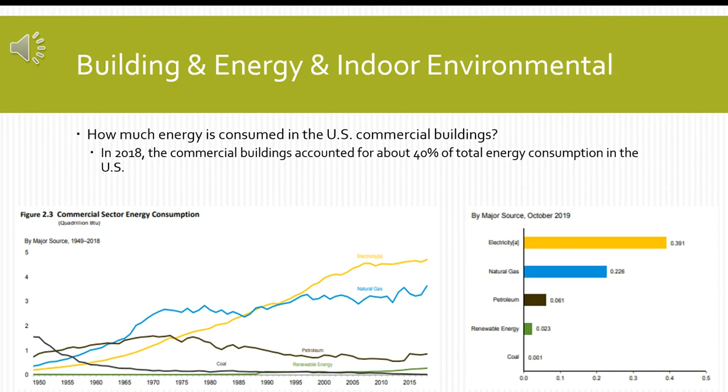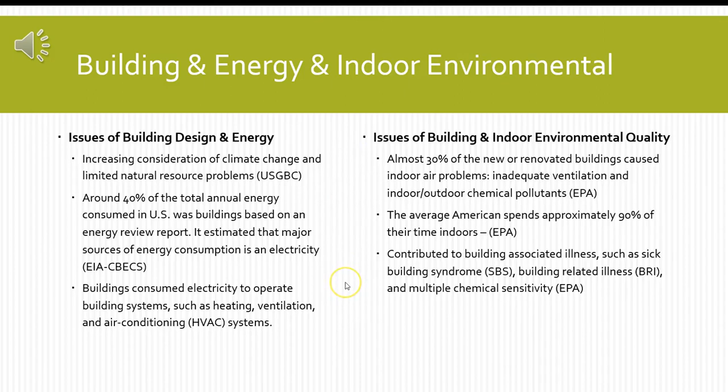Moreover, almost 30% of new or renovated buildings caused indoor air problems because of inadequate ventilation and indoor chemical pollutants. These problems also contributed to building-associated illness. Based on these issues and other research, building design and system were directly related to both indoor air quality and energy efficiency because of buildings' energy performance.

For these reasons, this research identified that sustainable applications to building design and system were critical for improving energy performance of buildings. Sustainable building goals are social equity, environmental justice, community health, and quality of life.

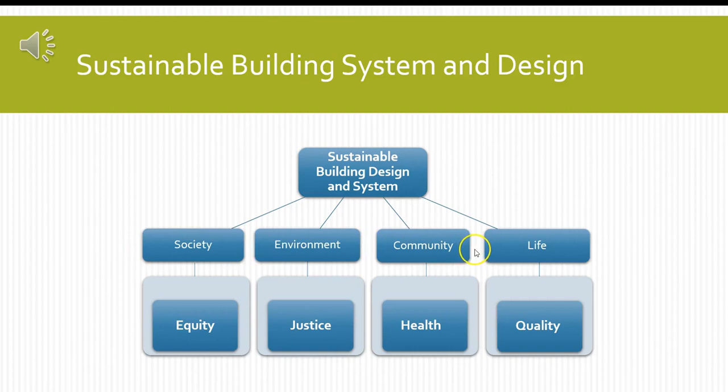The research studied to find out different factors in the combination of air system and building envelope design methods. For this purpose, the research used a building energy design and performance simulation software, Carrier's Hourly Analysis Program, HAP version 5.11.

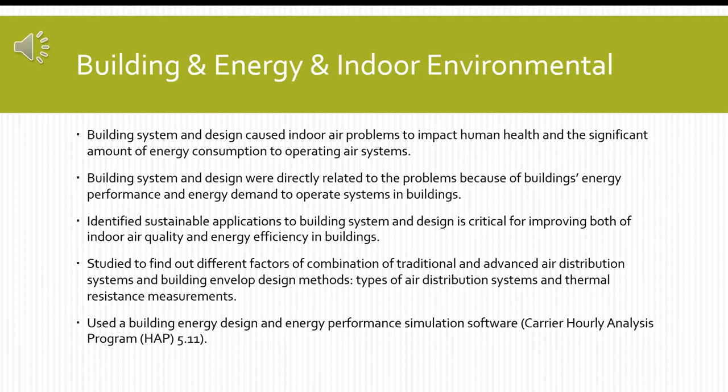This is the contents of this experimental research.

Statement of the problem: facing the challenge of energy efficiency and indoor environmental health, building research professionals were prompted to formulate solutions to meet these needs. The research problem of this study was based on the fact that the effects of advanced air distribution systems and enhanced building envelope design methods on indoor air quality and energy performance in buildings had not been well addressed.

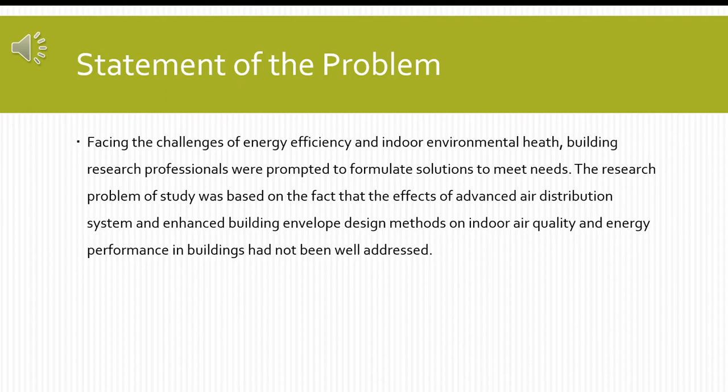Hypotheses and research questions. Based on understanding of the research problem and the related literature review, this research developed hypotheses and research questions. Hypothesis 1: factors of advanced air distribution systems will be able to improve indoor air quality. Hypothesis 2: factors of enhanced building envelope design will improve indoor air quality and energy efficiency.

Research question 1: to what extent will air distribution systems affect indoor air quality and energy efficiency? Research question 2: to what extent will building envelope design factors affect indoor air quality and energy efficiency?

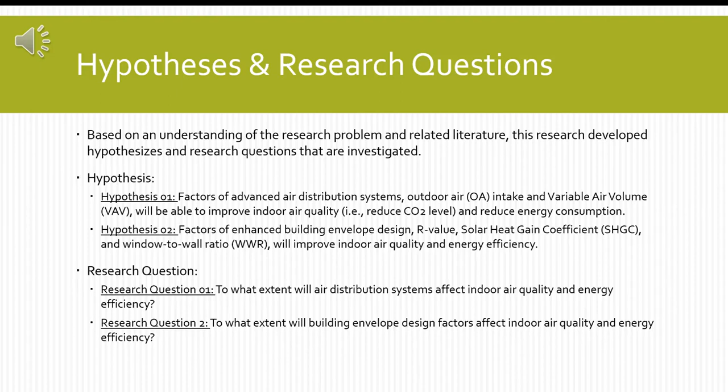This research map shows the study's attempt to address the research hypotheses and questions. Building envelope and air system methods were manipulated for testing indoor air quality and energy efficiency by using HAP research reports.

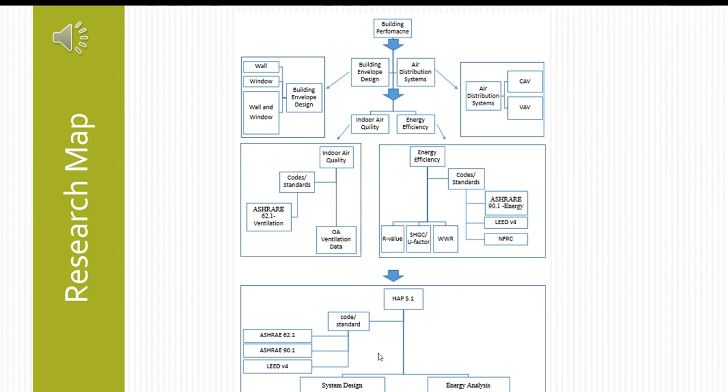Significance of the study: the study planned to investigate the effects of air system and building envelope design methods on indoor air quality and energy efficiency of buildings.

First, it emphasized enhanced building envelope design by comparing measures of thermal resistance values of the walls and windows: R-value, solar heat gain coefficient, and/or U factors, and window-to-wall ratio.

Then it also emphasized advanced air distribution systems by comparing traditional and advanced systems: constant air volume and variable air volume.

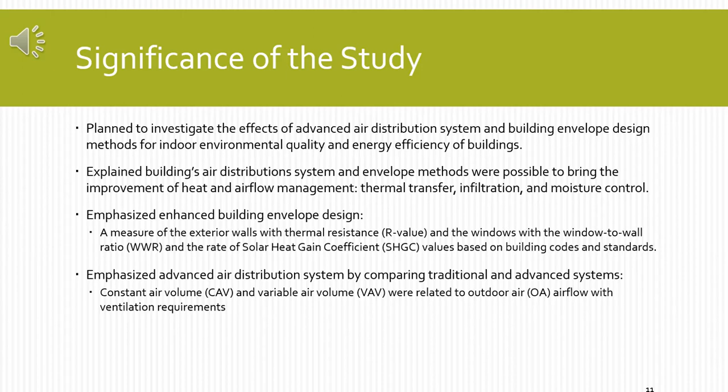The purpose of the research was to approach integrated building design and system regarding sustainable building goals. The objectives of the research were to examine combinations of building design and system methods to determine their impacts on indoor air quality and energy efficiency.

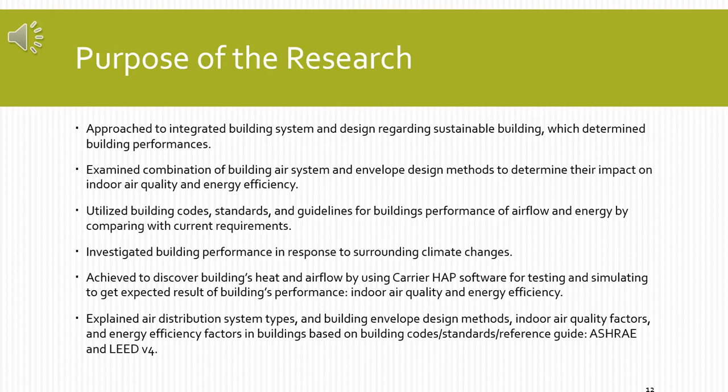It investigated building behavior and energy performance of heat flow and airflow in response to surrounding climate changes. It identified factors of energy performance for discovering indoor air quality and energy efficiency.

Research design and type: the research used experimental analysis to explore modifications to the building air system and building envelope design method by developing a whole building simulation model. It estimated indoor air quality and energy efficiency.

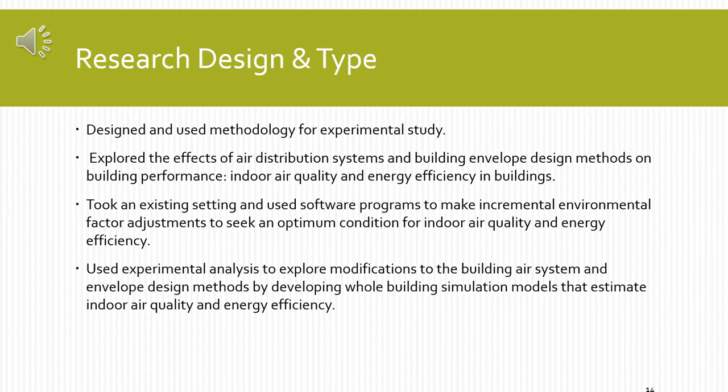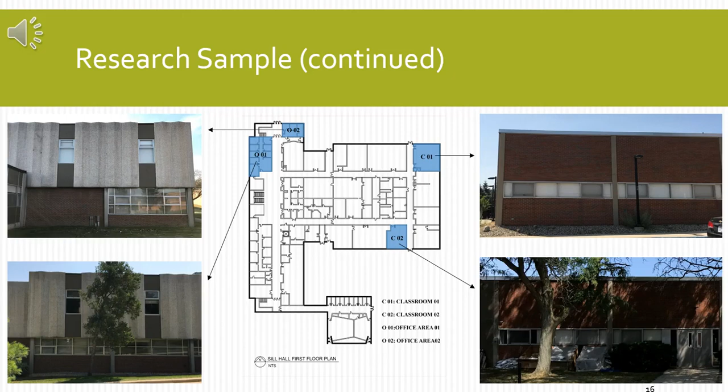The sample was classrooms and office areas within Sill Hall, an educational building at Eastern Michigan University. The pictures show the existing exterior wall conditions. The research used HAP as the data instrumentation.

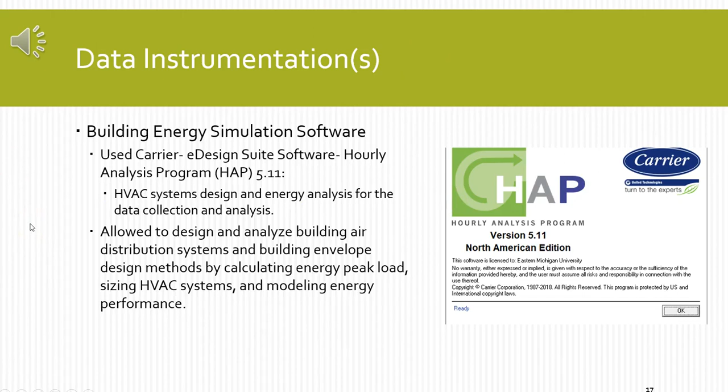Data collection: the software ran energy simulations by inputting data sets for generating system and energy reports to calculate heat gain, loss, and airflow rate. The research manipulated independent variables as causes for testing building performance.

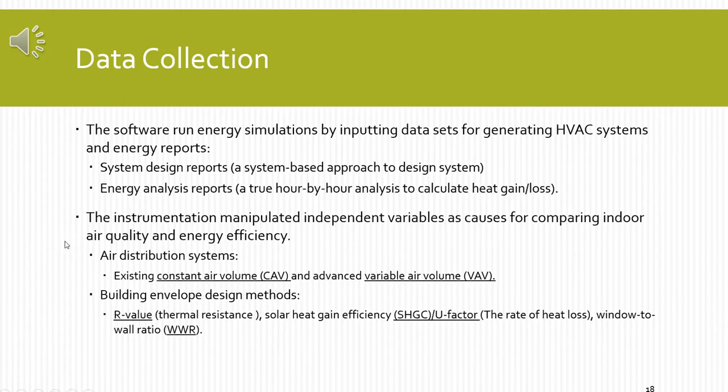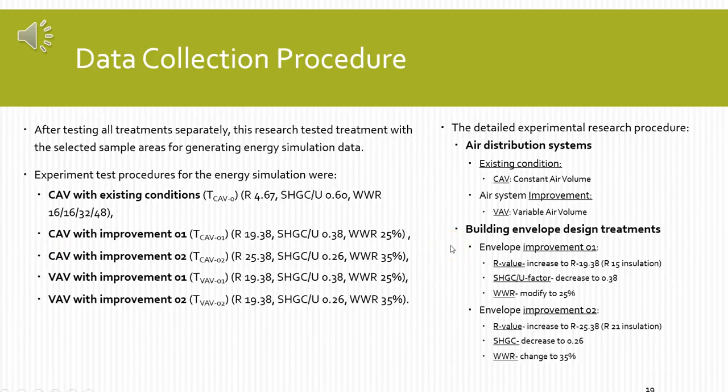The experimental research was conducted through software settings, testing variables and collecting data results. The diagram shows the experiment test procedures for the energy simulation.

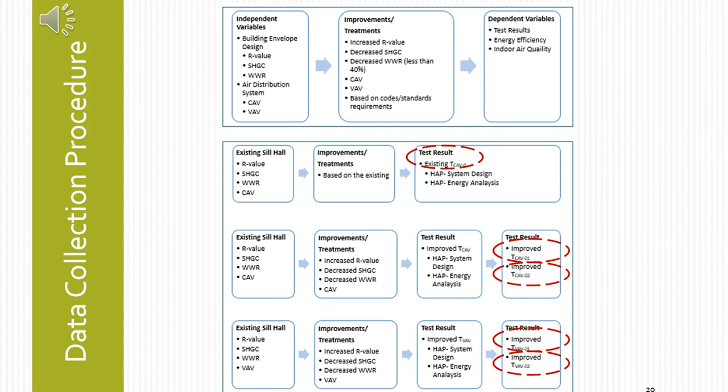Existing air system CAV with existing envelope conditions. Existing air system CAV with envelope improvement 1. Existing air system CAV with envelope improvement 2. Advanced air system VAV with envelope improvement 1. Advanced air system VAV with improvement 2.

The research gathered data to enter into the HAP 5.11 software to generate energy design simulation results. Input data settings explained weather, walls, windows, spaces, and air systems.

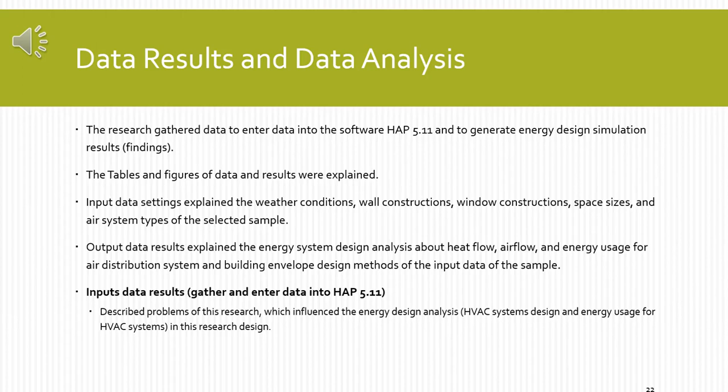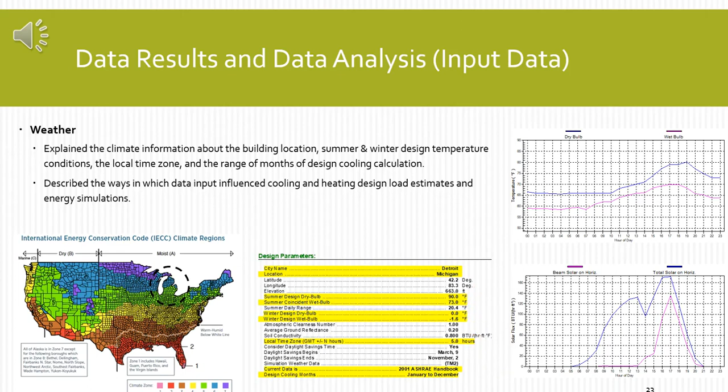Weather data included information about the building location, summer and winter design temperature conditions, the local time zone, and the range of months for the design cooling calculation. For this research, July 1st was set as the simulation date.

Wall data included information about construction material layers, showing total R-value. The R-value was increased to R-19 and R-25.

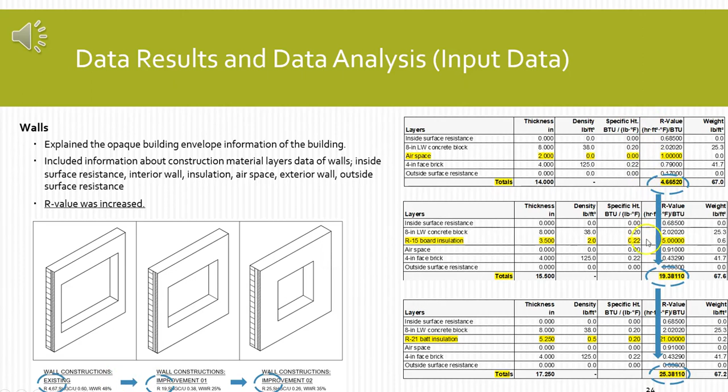Window input data included information about construction material data, height, width, and SHGC U factors.

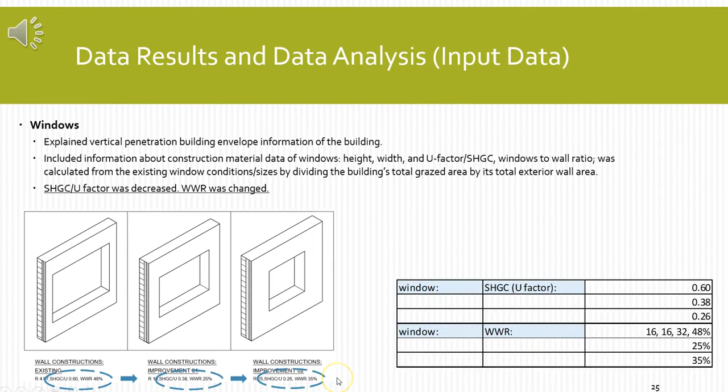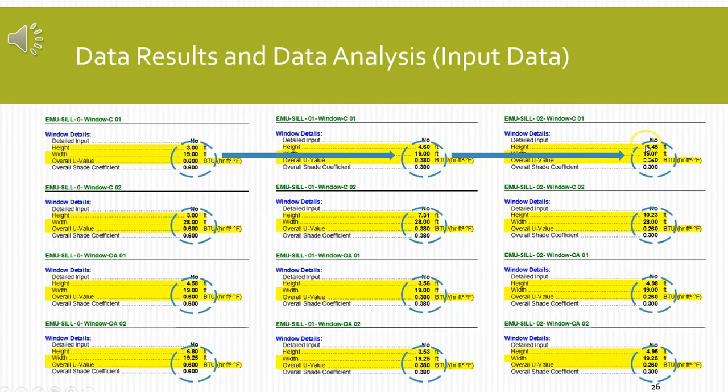SHGC U-factors were decreased to 0.38 and 0.26. WWR was changed to 25% and 35% by adjusting window height and width.

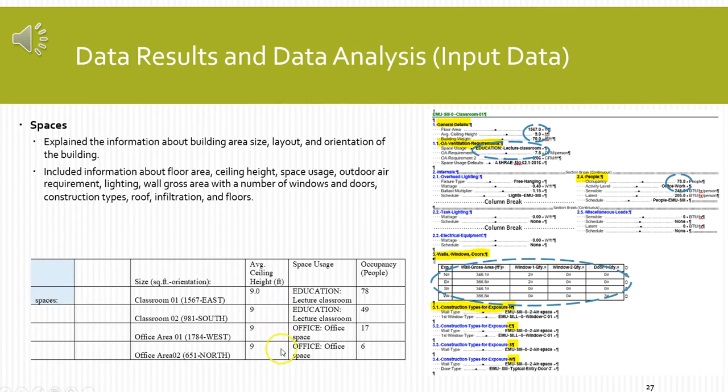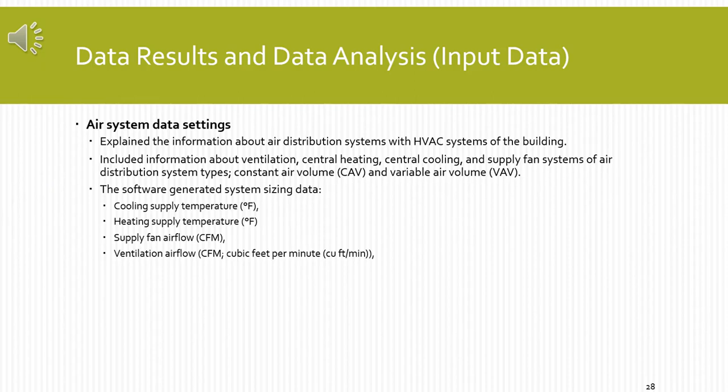Space input data included information about floor area, ceiling height, and space usage and occupancy. Air system data included information on the air distribution system, CAV and VAV. The software generated system sizing data for building load.

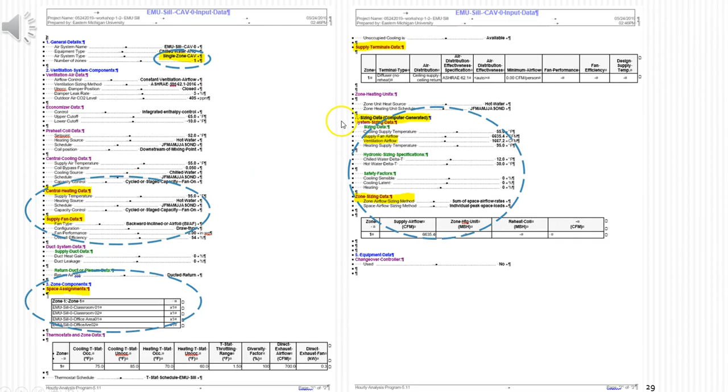The slide shows air system data of constant air volume, about central heating, supply fan, zone, system sizing data, and air distribution system type.

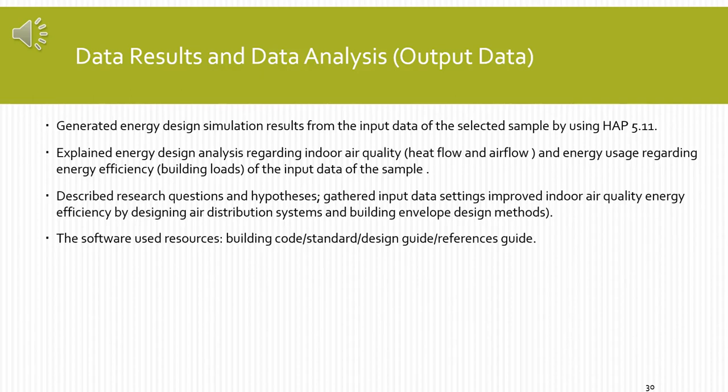The result output data explained the energy design analysis of heat flow and air flow regarding indoor air quality, and explained energy use of building load regarding energy efficiency. The total number of experimental research test reports was 5 results.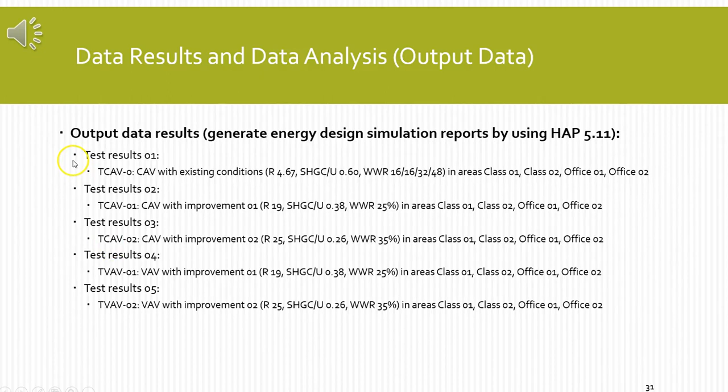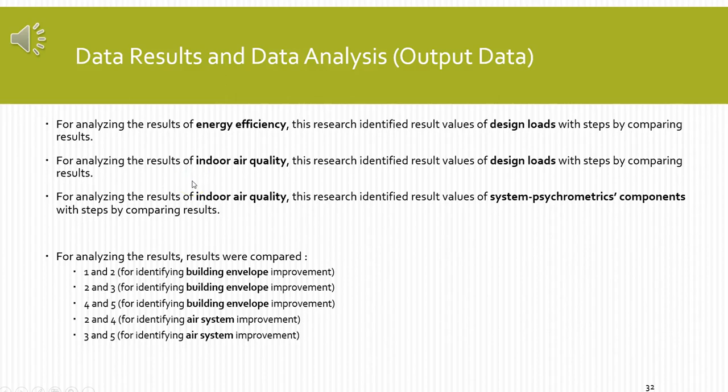For analyzing the result of energy efficiency and indoor air quality, results were compared. This research demonstrated the air system and building envelope method address heat flow and air flow, the amount of energy added or removed to keep an acceptable range of temperature.

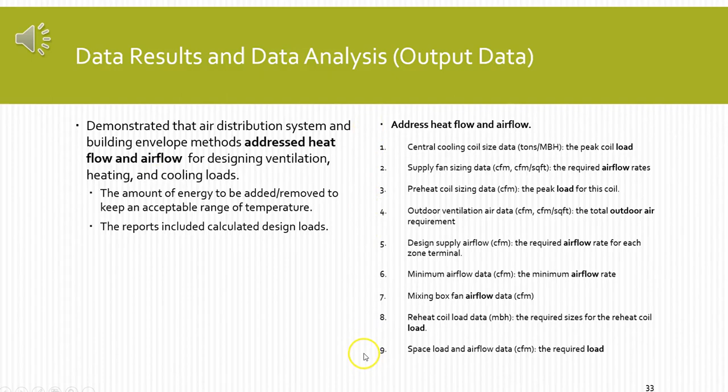The calculated load for the sample were listed number 1 to 9. The slide shows the calculated load number 1 to 9 of report 1 and 2. Then they were compared.

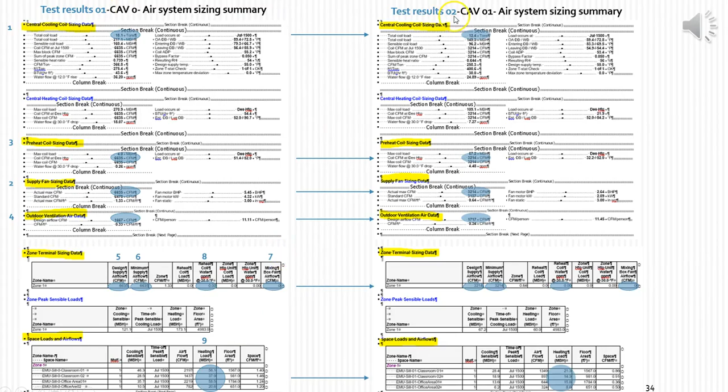For analyzing the result of energy efficiency, this research identified result values of design loads with steps. Result values were 1, 3, 8, and 9. CFM, cubic feet per minute, is a measurement of the velocity of air.

MBH, 1000 BTUs per hour, is a measure of the amount of energy. The values of the amount of energy used were decreased, so the energy efficiency was improved.

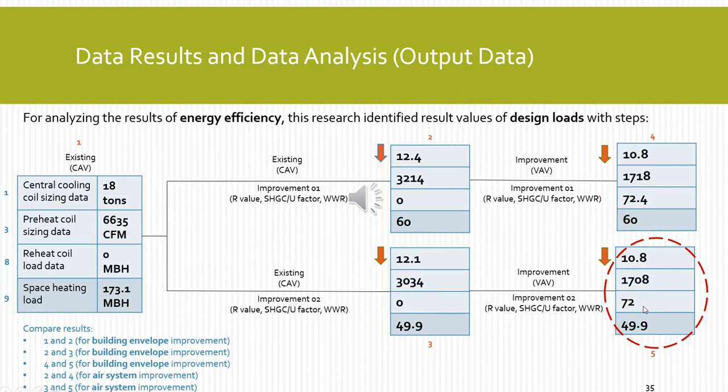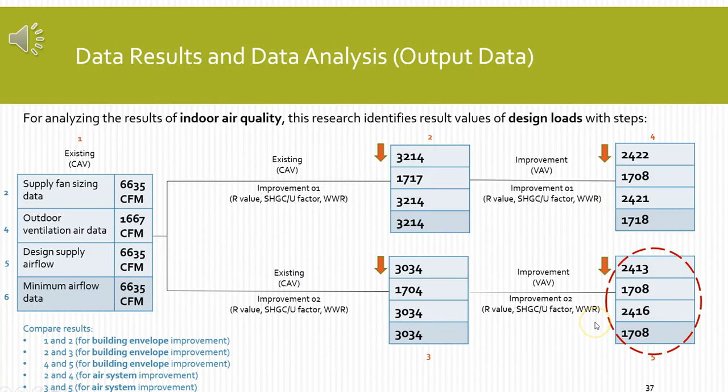For analyzing the result of indoor air quality, this research identified result values of design load with steps. Result values were 2, 4, 5, and 6. The values of the amount of air flow needed to maintain adequate ventilation and indoor air quality were decreased, so indoor air quality was improved.

This research demonstrated that air systems and the building envelope addressed airflow with air-water mixtures, the amount of air added or removed to keep an acceptable range of airflow.

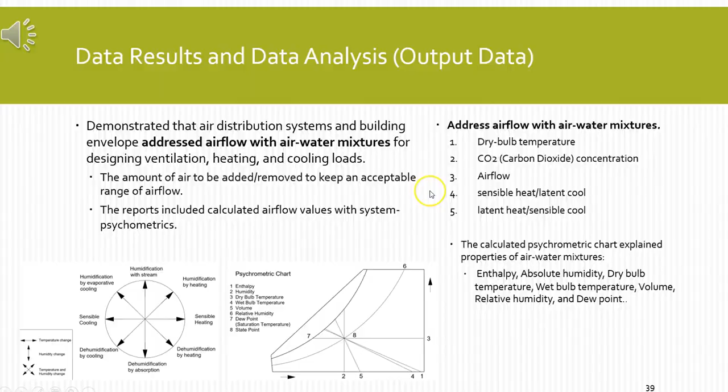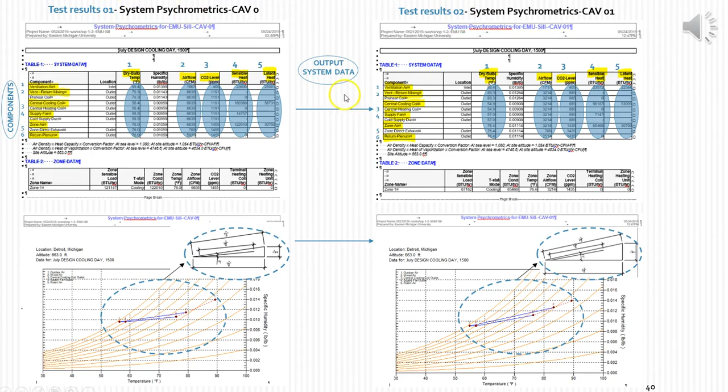The calculated values of system psychrometric components were listed number 1 to 5. The slide shows the calculated values number 1 to 5 of report 1 and 2. Then they were compared, and the values were shown on a psychrometric chart.

For analyzing the result of indoor air quality, this research identified result values of the calculated system psychrometric component with steps. The values of the amount of air flow and water vapor of air needed to maintain adequate ventilation and indoor air quality were decreased, so indoor air quality was improved.

The system required less air to provide clean air to spaces by improving the building envelope. The system requires less air to circulate and manage air in spaces by improving the air system. The CO2 concentration levels decreased.

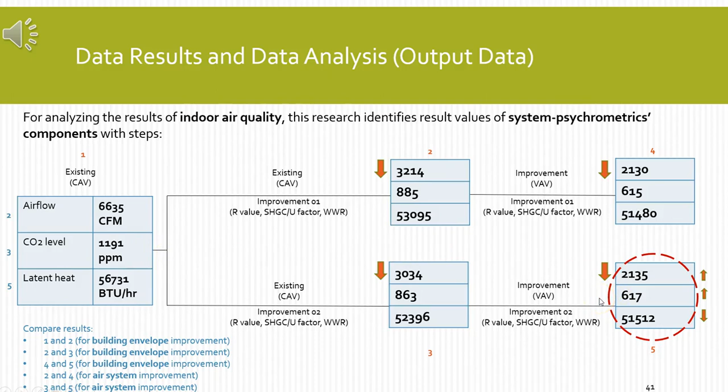Managing different conditions of various spaces properly depends on the demands of those spaces to maintain adequate indoor air quality. The indoor air quality was improved.

Under the proper cooling conditions, lower supply airflow speed was identified. Less airflow was required for maintaining air quality well, by supplying fresh air and managing temperature and humidity.

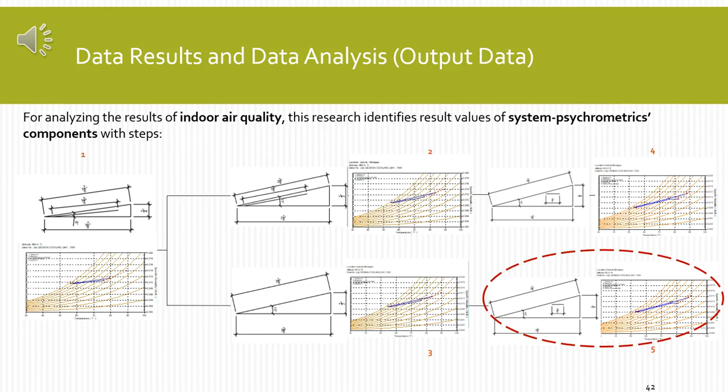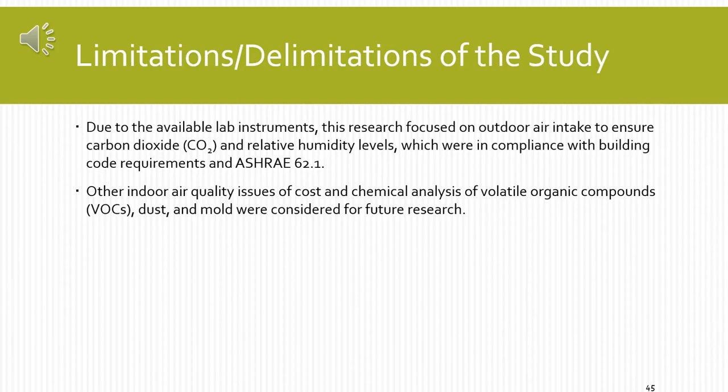Limitations of the study: the research focused on outdoor air intake to ensure CO2 concentration, air temperature, and relative humidity levels meet building code requirements. Other indoor air quality issues of cost and chemical analysis were considered for future research.

Conclusions and findings: the modified properties of air distribution systems and building envelope design were examined to check the provided healthy indoor air quality and saved energy use in buildings.

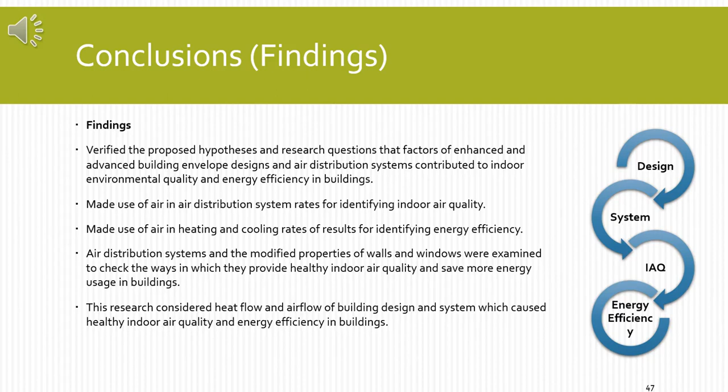For identifying improved indoor air quality, the research showed a decreased result of the calculated values of airflow. For identifying improved energy efficiency, this research showed a decreased result of the calculated building load. This experimental result showed the significant changes from manipulated treatments: air system improvement and building envelope improvements.

For achieving improved indoor air quality and energy efficiency, building system and envelope design method were considered together, because when system and design method work as a partner, buildings further improve indoor air quality and reduce overall energy use.

This research estimated that the optimized building design and system method will result in more significant changes in energy use, building load, and indoor air quality and airflow rate of the tested building.

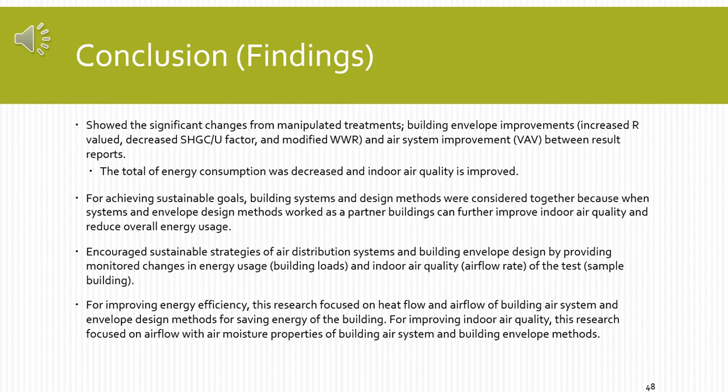Recommendations: the research suggested further research questions and hypotheses, by modifying air system and envelope design method regarding indoor air quality and energy efficiency.

Further research will expand the range of independent variables by adding more improvements: higher R-value, lower solar heat gain coefficient, and manipulated window-to-wall ratio. Moreover, it will include energy recovery systems as advanced air systems, and window shading systems as enhanced building envelope design.